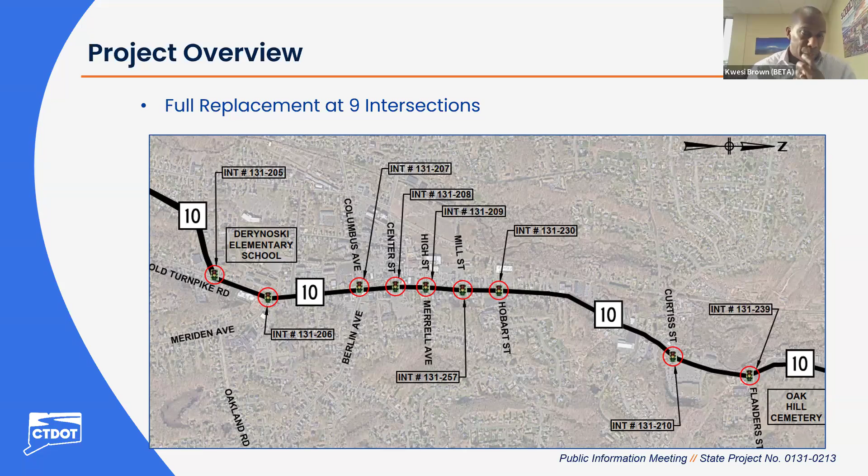So why are we doing this project? The purpose and need of this project is to replace aging signal infrastructure with new equipment to achieve a state of good repair and also to improve traffic operations on this Route 10 corridor. Some of the improvements we will be implementing include new signal equipment at the intersections, pedestrian accommodation improvements, which includes the installation of new curb ramps as well as sidewalks.

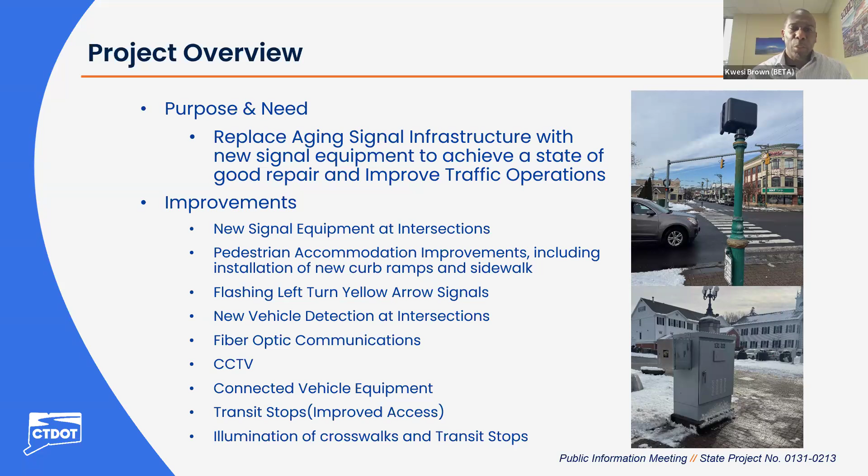In some locations, we'll be implementing flashing left turn yellow arrow signals, new vehicle detection at all the intersections, fiber optic communications between the 9 signals, CCTV cameras at each location, and also connected vehicle equipment, and improved access to transit stops, as well as illumination of crosswalks and transit stops within the corridor.

Next slide. So in terms of the improvements themselves, with the traffic signal equipment, we'll primarily be looking to implement new mast arms. I think there's only one location where we'll be using span poles. So for the most part it's mast arms, obviously new signal heads, new vehicle detection, as well as new controllers at each of these intersections, emergency preemption equipment, and communication equipment.

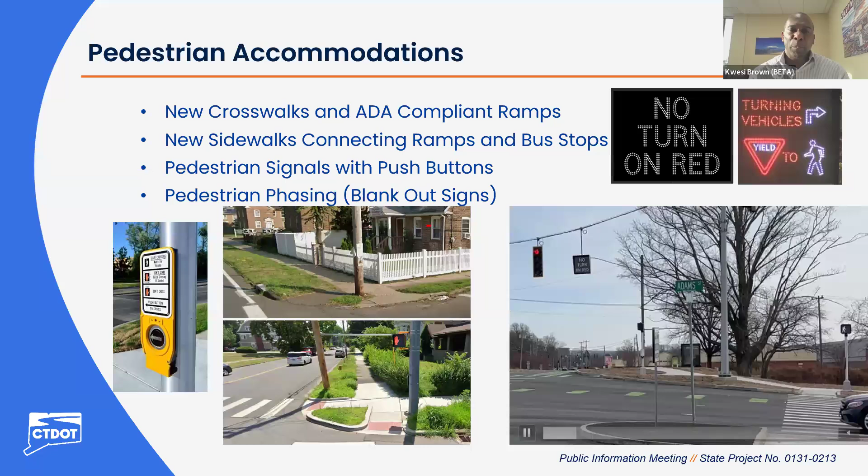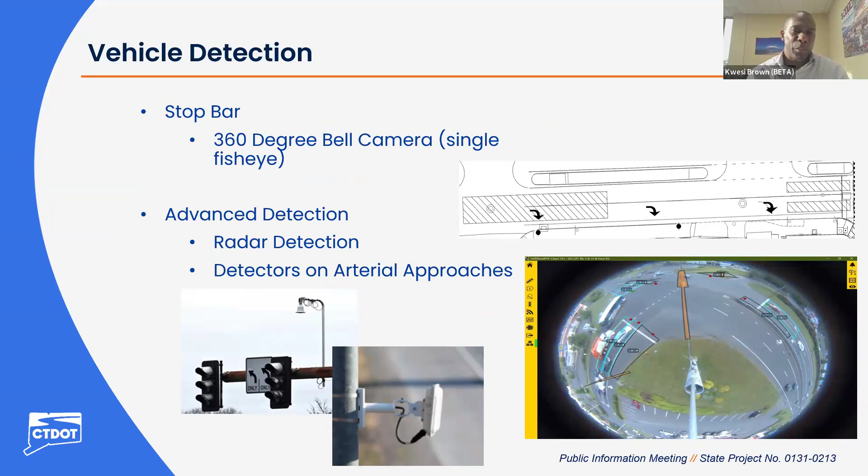Next slide. With respect to vehicular detection, we'll have two types. The first one being a 360-degree camera for stop bar detection, so it'll be able to pick up any vehicles at a stop bar. We also have radar detection for advanced detection of vehicles approaching each intersection.

Next slide, please. In addition, we talked about fiber optic communications, where the individual intersections can communicate with each other. Currently, what's out there is aerial copper interconnect, and we are going to be replacing that aerial copper interconnect with a 48-strand fiber optic interconnect, which is going to go underground along the length of the entire corridor. And then from the corridor, we're going to have a wireless cellular communication to the Connecticut DOT Highway Operations Center as well. Next slide.

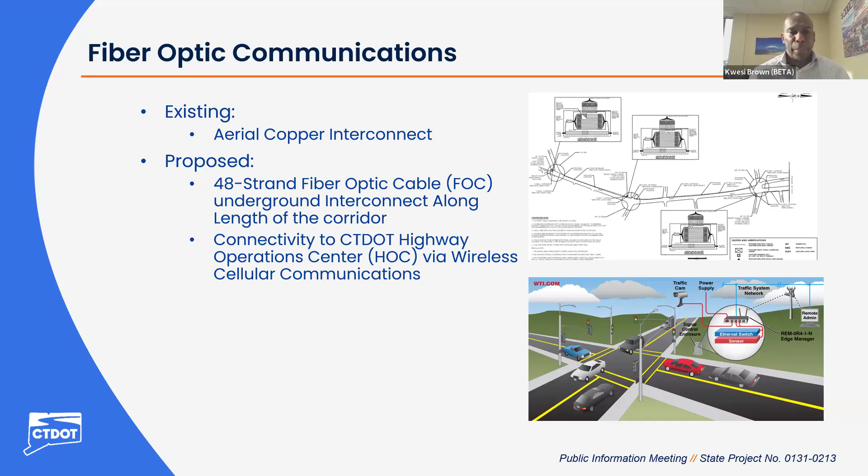So for this first intersection, Route 10 at Old Turnpike Road, that is the southernmost intersection within the corridor. Again, north is to the right of the screen, as you can see from the yellow arrow. This is a three-legged intersection. Currently, in terms of signal equipment, we have a span wire design, and it also has two crosswalks, one across the west leg and one across the south leg of the intersection. This intersection currently has an exclusive pedestrian phase.

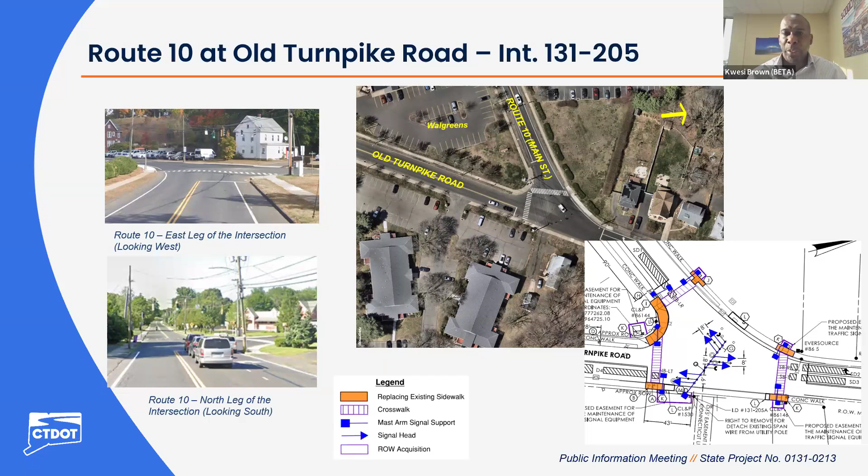There are going to be some easements, as you can see in the graphic. There are probably going to be about 5 easements at this location for the maintenance of traffic signal equipment, as shown in the purple rectangular areas.

The next intersection is Route 10 at Route 120 and the School Access Drive, intersection 131-206. This is a four-legged intersection. The Derynoski Elementary School is shown on the graphic, and the Southington Public Library is also shown in the southeast corner. The west leg, the school driveway, is an exit-only driveway.

In terms of existing equipment, this is a span wire intersection with three crosswalks and an exclusive pedestrian phase. What we're proposing, as shown in the bottom right graphic, is mast arms with crosswalks on all legs, and we are proposing to keep the exclusive pedestrian phase because of the school at this location.

There is going to be one easement identified right now, in the southwest corner of the intersection. Again, it's a common theme—all these intersections are going to have new video cameras, CCTVs, and preemption equipment as well.

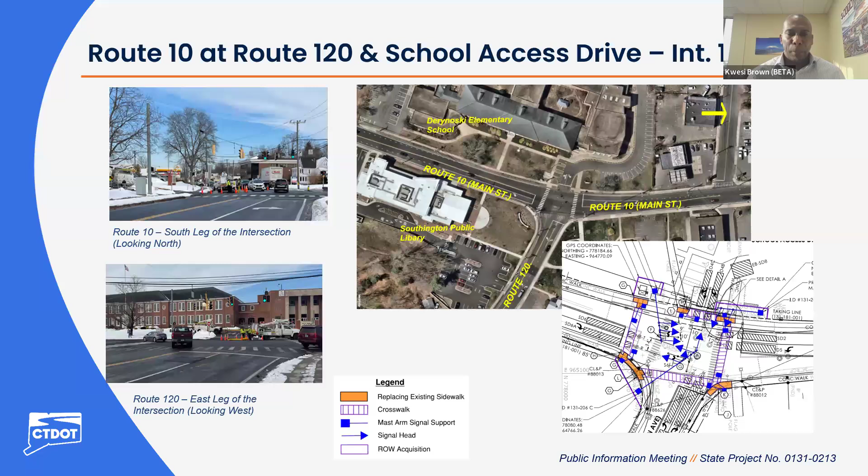This is also a location with a span post and span wire design. There's crosswalks on four of the five legs, with pedestrian signal equipment on only two legs. What's being proposed is to keep the span wire design because of the configuration, with crosswalks on all five legs and pedestrian signal equipment. Vehicular detection, CCTV, and illumination improvements will also be implemented.

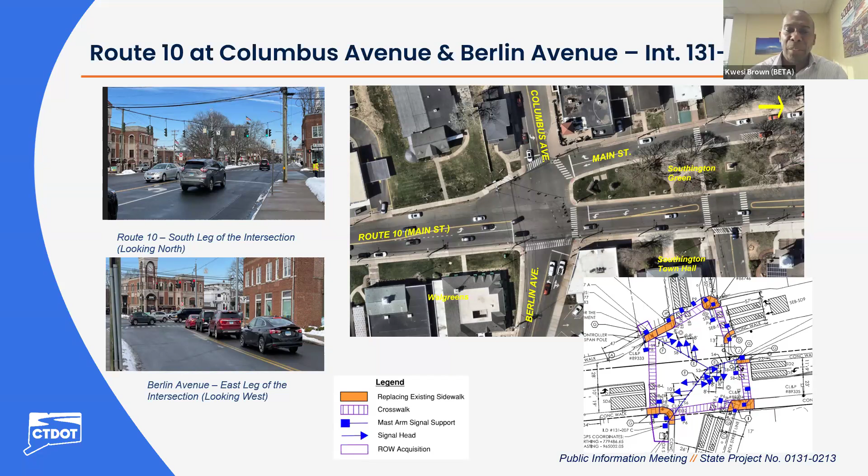There are actually two locations where easements will be required, in the southwest and southeast corners of this intersection.

Next one is Route 10 at Center Street at Riccio Way, intersection 131-208. This is a four-legged intersection. The Center Street leg is one-way going westbound. This intersection has two mast arms that will be replaced. There's crosswalks on all the legs, and we are proposing to keep crosswalks on all legs as part of this intersection upgrade.

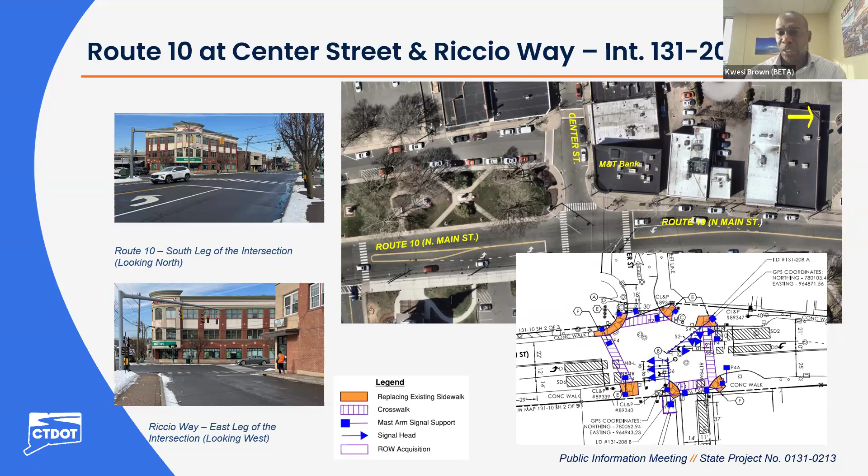Again, video cameras, CCTV, preemption, and new controllers will be provided at this location. There will be an easement required at the southeast corner of the intersection, as shown in the purple box.

Next one is Route 10 at High Street at Merrell Avenue, intersection 131-209. This is an offset intersection, with north to the right of the screen. This intersection has mast arms, two crosswalks, and no pedestrian signal heads right now.

What's proposed is a new mast arm to serve the intersection—actually two mast arms—with crosswalks on all legs, new pedestrian signal equipment, and traffic signal phasing improvements. One location would require an easement, one parcel on the northwest side of the intersection.

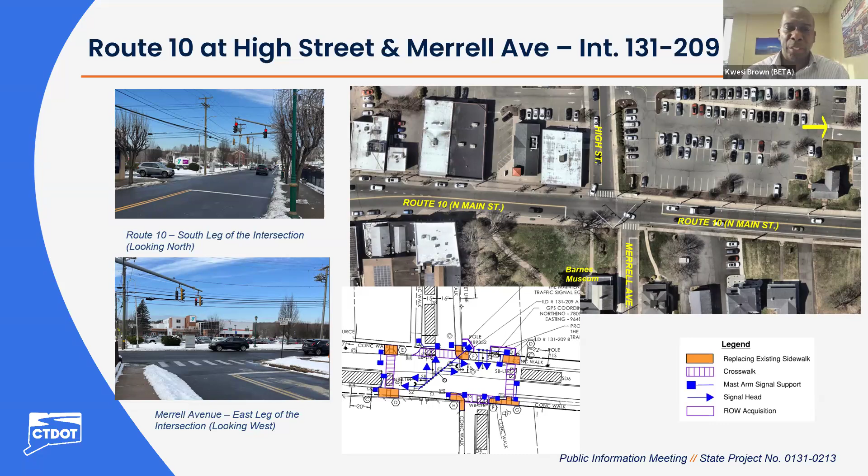Route 10 at Mill Street, intersection 131-257. This is a three-legged intersection with one mast arm and only one crosswalk, as you can see in the aerial. This location does not have any pedestrian signal equipment either.

So the improvements will be a mast arm for the approaches with pedestrian signal heads, crosswalks on all legs with curb ramp improvements, new pedestrian signal equipment, video camera, CCTV, and preemption equipment.

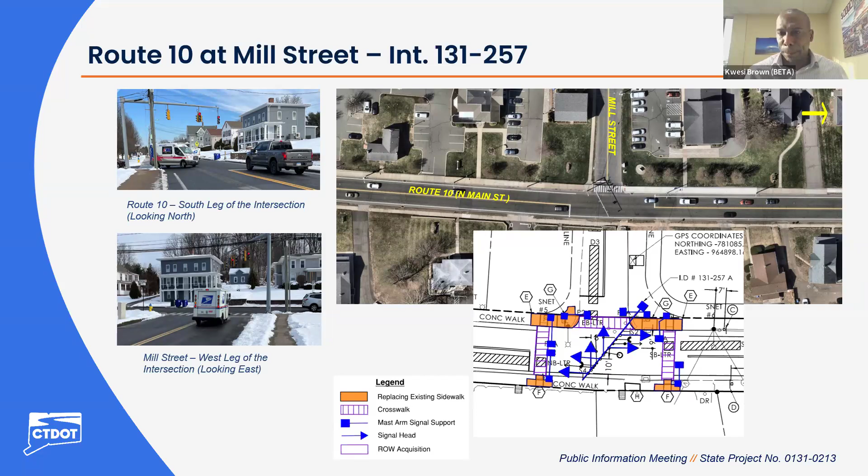Continuing north within the corridor, we have Route 10 at Hobart Street, intersection 131-230. This is also a four-legged intersection with one mast arm, 3 crosswalks, and an exclusive pedestrian phase. What's proposed is new mast arms at this location, crosswalks on all legs with curb ramp and sidewalk improvements, and a concurrent pedestrian phase.

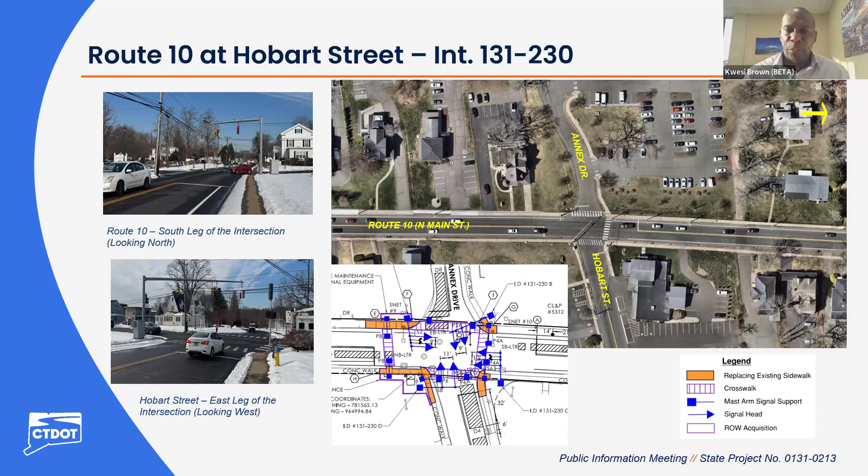There will be some easements required at this location. We'll have vehicular detection improvements, CCTV cameras, and preemption equipment as well.

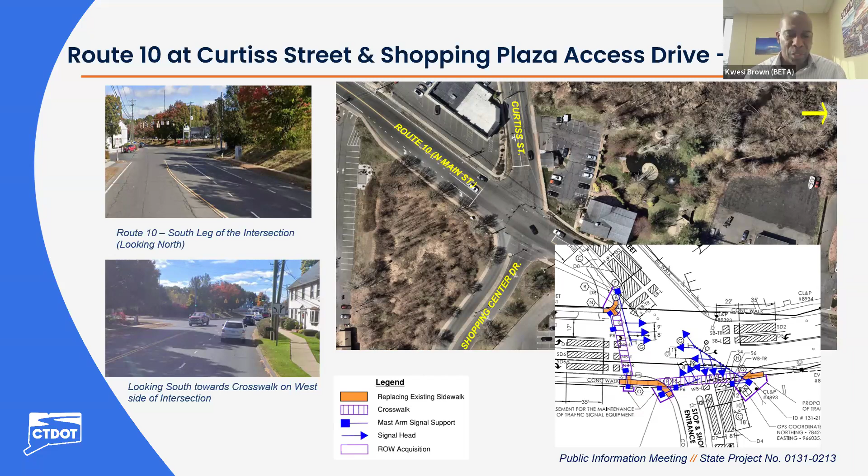Two crosswalks, one across the southern leg and one across the Stop and Shop driveway. The parcel in the northwest corner is deemed historic, so there's not much we can do in that corner. We try to stay away from that so we wouldn't impact that property, and so we're limited to 2 crosswalks at this intersection. Again, new cameras, CCTV, and preemption equipment would also be implemented at this location.

Lastly, the northernmost intersection within the corridor is Route 10 at Flanders Street and Cemetery Driveway, intersection 131-239. You have the Cemetery Driveway labeled in the aerial. Currently this has a span wire design. There are no crosswalks and no pedestrian signal heads at this location. We are proposing 2 mast arms, and there'll be a crosswalk across the Flanders Street leg of the intersection with concurrent pedestrian phasing.

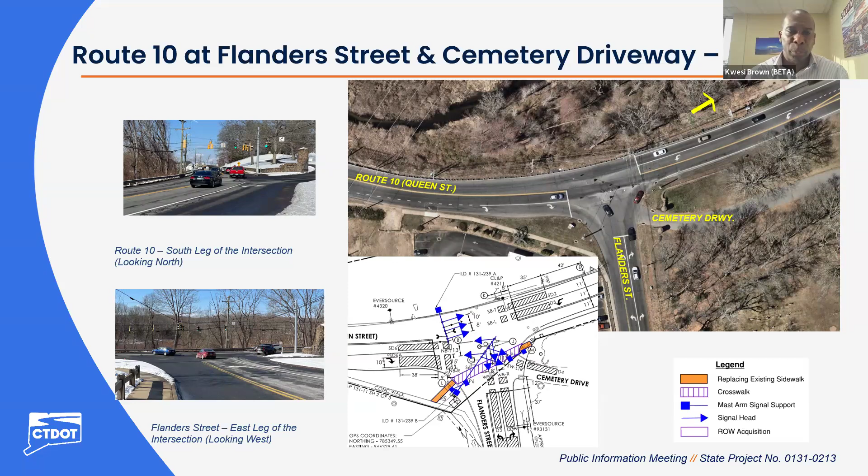In terms of project coordination, we've been coordinating with town staff. DOT sent town notification letters in March of this year, and we had a virtual meeting with town staff on May 27th. Design coordination has been ongoing. We're obviously having this virtual public info meeting tonight, and we'll continue to coordinate with the utility companies. We have a virtual meeting coming up sometime this month, and then a field meeting in early July as well.

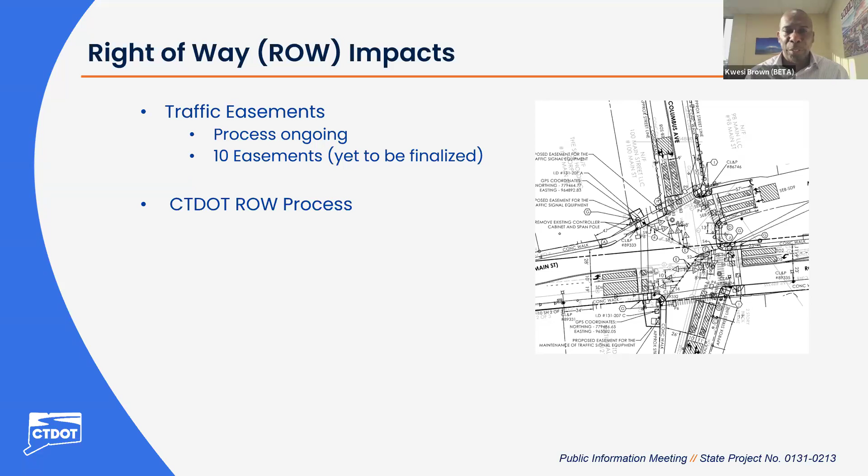As I've indicated, there will be some impacts to right of way, particularly getting some traffic easements. So far we've identified about 10 easements that will be needed, but that process is ongoing and has not been finalized yet. Any easement would have to go through the Connecticut DOT rights of way process.

And so with that, I'll hand over to Malcolm Thomas to talk a little bit more about the DOT rights of way process. Thank you, Kwesi. Good evening. As mentioned, I'm Malcolm Thomas, an assistant project coordinator with the Department of Transportation Rights of Way Division. Our office is responsible for acquiring necessary property and property rights for transportation projects throughout the state. I'm here to provide a brief overview of our acquisition process.

This project will require the acquisition of property rights, and specific property impacts are still being determined and finalized as the design progresses. Any property and property rights will be acquired in accordance with Connecticut General Statutes Section 13A-73 and 13A-98E, as well as the Uniform Act. The state will only acquire property rights or property deemed necessary to the project. Once all the impacts have been determined, the right-of-way acquisition process will begin. Impacted property owners will receive a formal letter of intent to acquire, along with a property map depicting the exact property rights to be acquired by the state.